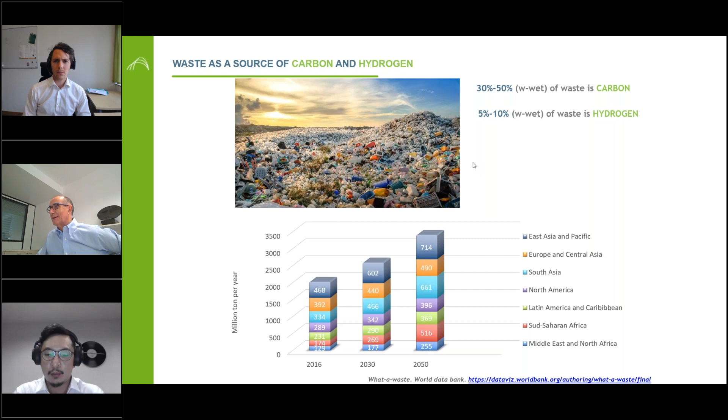This means there is a feedstock available every day, with logistics already in place which works every day, so it is very easy to intercept this supply chain and have a waste feed for the plants.

Our technology is partial gasification. It is a robust technology, and the first units were built in Japan at the beginning of 2000. So now there are more than 20 years of operating experience, and we adapted the technology to the different routes that we now follow to produce many products. All these references show that the technology is very well industrially proven.

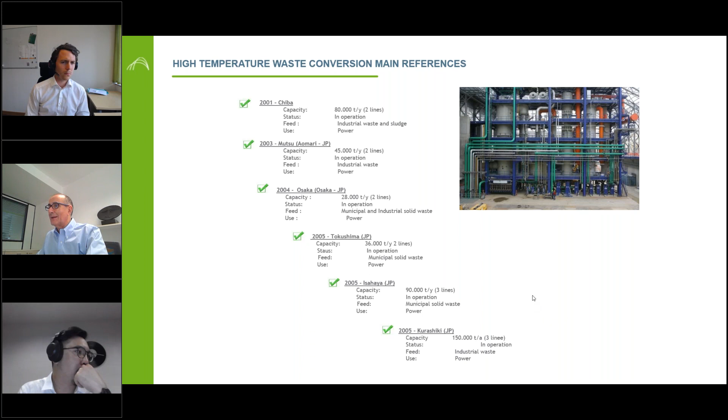In this slide, you can see the principle of how this unit works. There is waste, with its heat content, put inside the reactor.

From the bottom, we generate a liquid inert that is then vitrified once in touch with water, generating small spheres of such a dimension, completely inert, that can be used for landfilling.

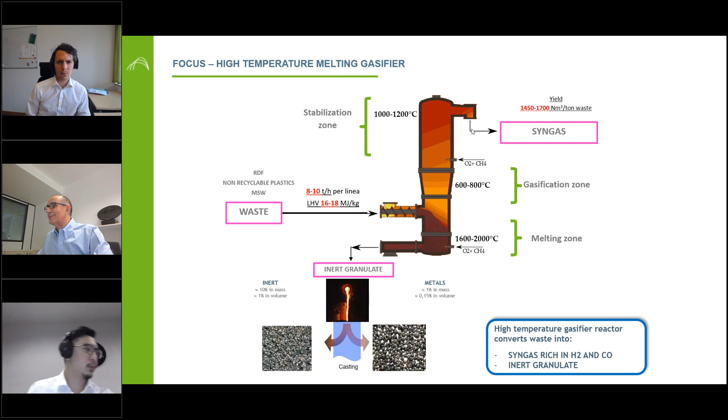At the top, we generate the syngas produced, and now the syngas is submitted to different levels of cleaning and purification so we can adapt other catalytic processes along the line. In the first purification, there is a quench, then an acid scrubber, then an alkaline scrubber.

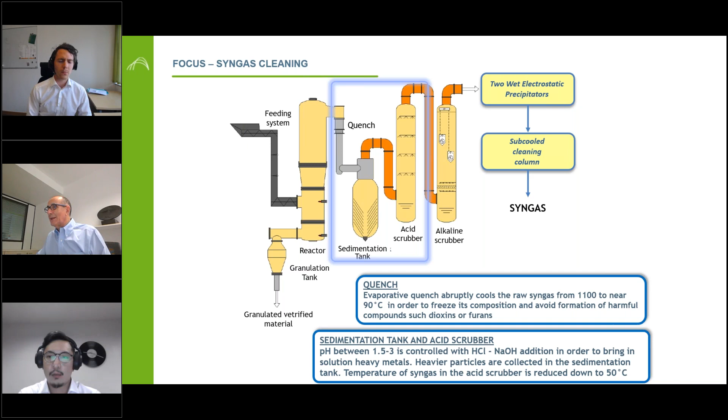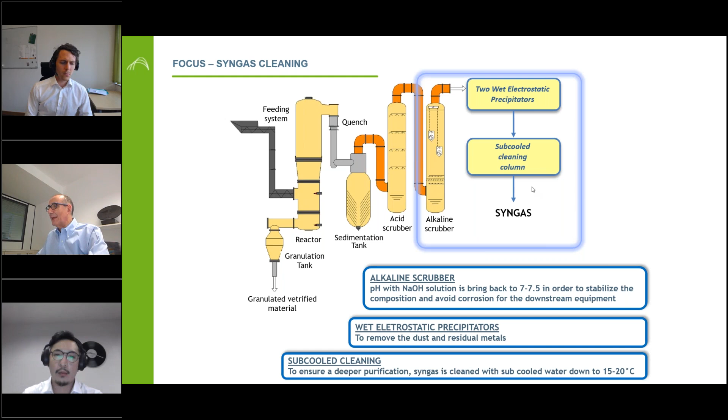Let me emphasize that all the chemical reactions take place in a reduced atmosphere. This means we don't have production of NOx, dioxins, furans, etc., because we are in a reduced atmosphere. After this cleaning, we go with two electrostatic precipitators in order to retain any kind of particles, and then the syngas is ready to be submitted for different purification schemes.

To summarize, it's important that waste doesn't require any special pretreatment. We can admit any kind of urban waste, with no problem regarding chlorine content. Overall plant reliability is very important, so we have several gasifiers in parallel in order to guarantee 24/7 operation of such a unit.

No fly ash production, no dioxins, as I said, deep abatement of contaminants, and then the syngas in the end is rich in hydrogen and carbon monoxide, more or less half hydrogen in volume percent and half carbon monoxide.

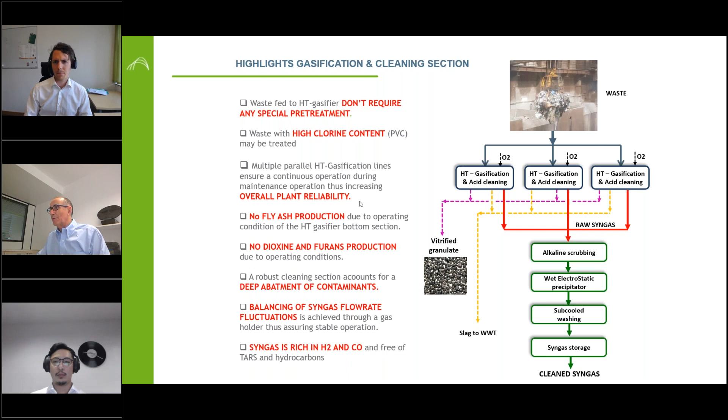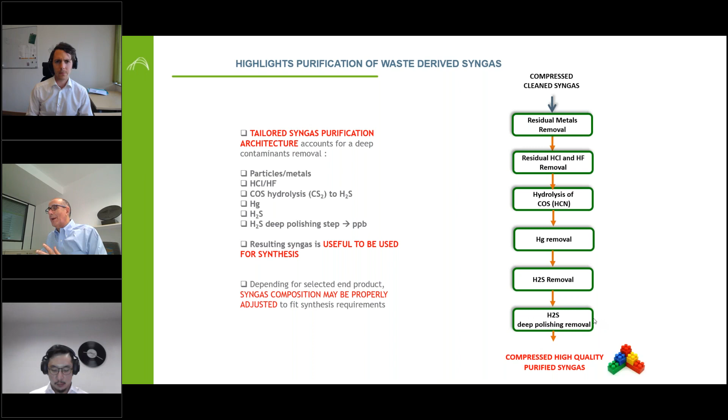Once we have the clean gas, we have removed the residual metals, hydrochloric acid and HF. Then there is hydrolysis of COS and HCN, Hg removal, H2S removal, deep polishing of H2S, and now the gas is ready to go ahead for the catalytic conversion.

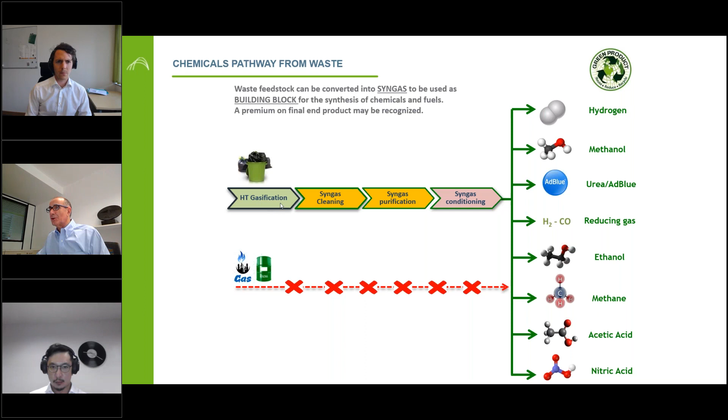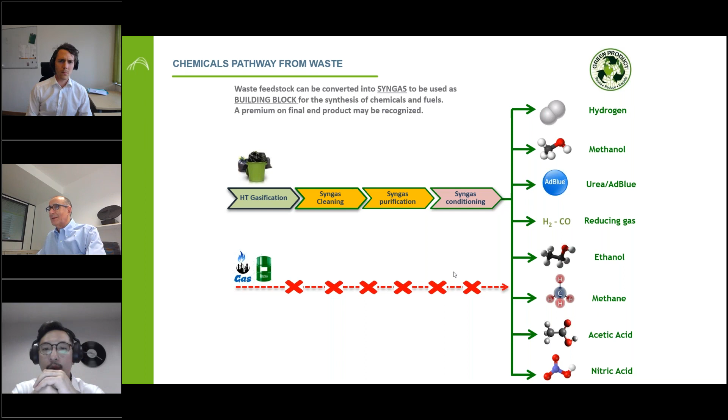This is the scheme that I presented: from gasification, cleaning with water and acid, then chemical purifications, and then all that we can produce. Now we are going to concentrate on methanol, but there are a lot of products that, once you have a syngas, you can generate, starting from the waste.

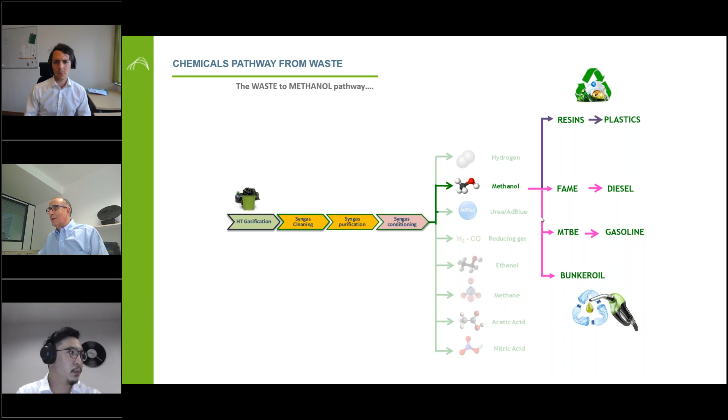Waste to methanol approach. Once we produce methanol, we can do a lot of things with it. We can use biomethanol for resins in plastics, for FAME biodiesel, to produce MTBE for gasoline blending, or very importantly, as bunker oil, which can be the new fuel for the shipping industry if it has to reach very stringent CO2 reductions on the pathway towards 2050. So there are many possibilities, many fields of application for methanol.

An important thing about such a scheme is the CO2 benefit. In the existing case, normally waste is incinerated to produce power, and that produces CO2. At the same time, if you produce methanol starting from natural gas, you also produce CO2. But if we combine everything together, we save the waste-to-energy plant, no longer needing incinerators. We have just one complex that can produce chemicals while also getting rid of the waste generated, meaning there is a significant CO2 reduction.

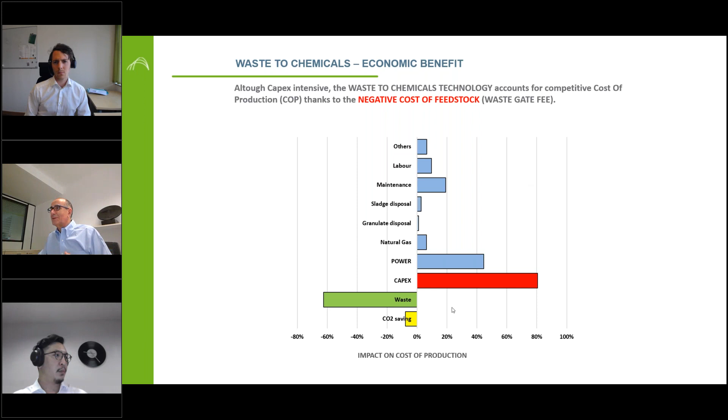Later on I will give you some data on the business case. In this slide, let me tell you the two important cost factors: the capex, because we need to invest significantly, and also the power consumption to produce oxygen from air distillation, which is the operating cost of the air separation unit. Then there are benefits in terms of CO2 savings, reducing the cost of CO2, and also what we call the waste gate fee. In Italy or Europe, when we treat waste we receive money from the government, so we call this the gate fee - it's a negative cost of the raw material.

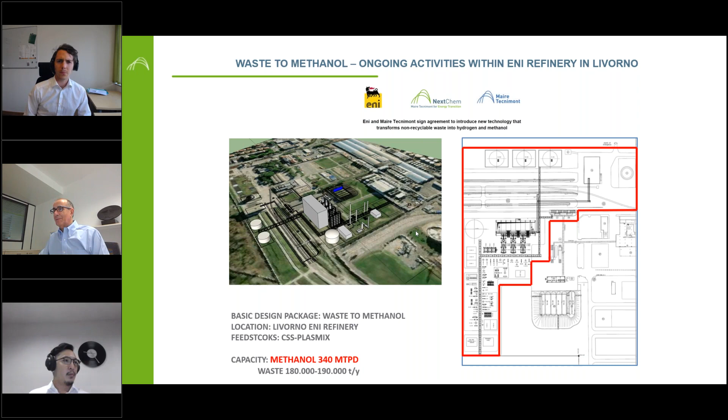This is to discuss a real case. Our idea is not just an idea, it's a real project - the first project in the world, currently in the design phase at the Livorno refinery. Livorno refinery belongs to the Eni group, and this unit includes the tanks and the gasification area. On this side is the rest of the refinery. It's a medium-sized refinery.

The engineering schedule of this project will be completed by this summer, in August. The raw material we are studying is RDF, and also non-recyclable plastics. It's a mix, more or less 20-30% plastics, and the rest is RDF.

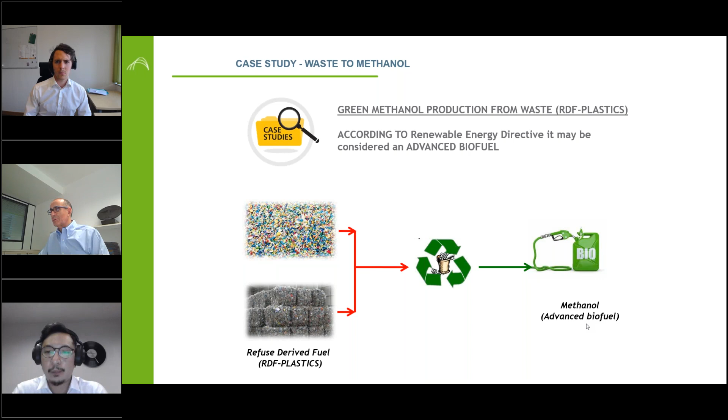The second section is the purification I mentioned before - conditioning - and once we have the syngas, we go into methanol production. With the catalyst we have options, and in any case we are proposing Johnson Matthey technology.

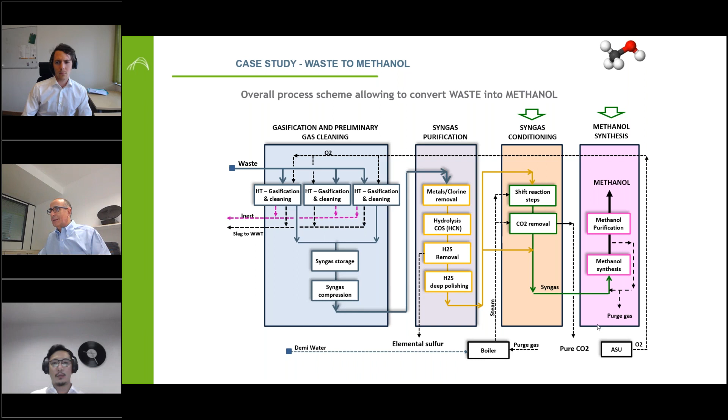Once the syngas is produced, it's important to achieve this key parameter for the methanol reaction - we need a ratio of 2.1. This means we have to increase the hydrogen concentration in the syngas, and to do this we perform a bit of a shift reaction, removing the CO2 produced. This way, we achieve the data we need before going into the methanol reactor.

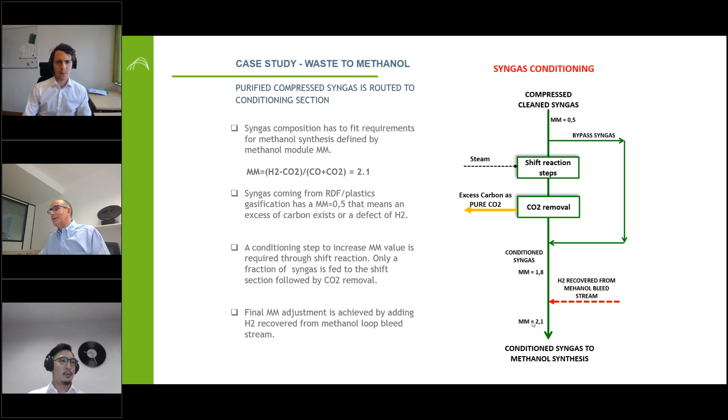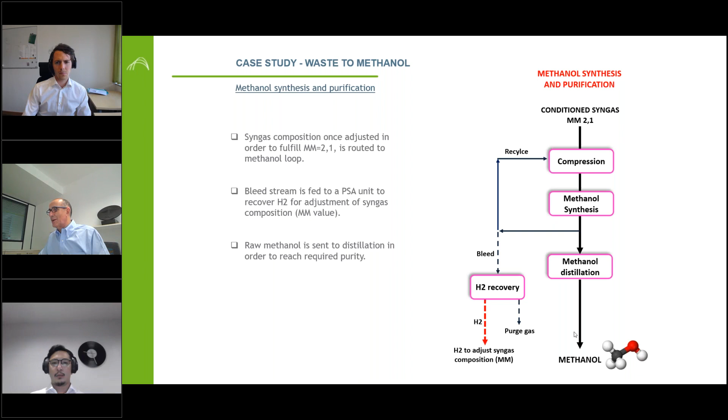Again, here is the scheme: compression, then methanol distillation and methanol production.

To summarize, I've put together all the numbers so everyone can develop their own economics for the project. As I said, the feedstock is a little less than 200,000 tons per year of this kind of feedstock. Then there's power needed for the air separation unit, a bit of demi water for the shift conversion, and a bit of natural gas to maintain constant temperature in the gasifier, depending on the heat value of the feedstock. Then there's the CO2 we generate and the methanol we produce - more than 100,000 tons per year, more or less. With 2 tons of waste, I produce 1 ton of methanol.

Another important data point is the CO2 that we save in this process. When methanol is generated and used as fuel, you generate CO2, even though it is of organic provenience or from waste. What is important is that during this process, compared to the conventional scheme of producing methanol, we save all this quantity of CO2.

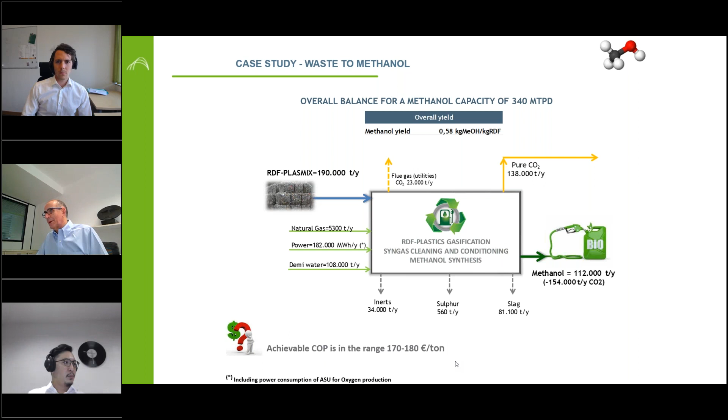Going to my conclusions, let me say that this technology absolutely represents a competitive process, performing a low carbon footprint. It is very, very important because if we have to reduce the carbon footprint, this technology is in this direction.

Another important thing: waste represents a valid source in the world of carbon and chemicals. So I think that the technology we propose can be a real alternative to feeding incinerators. The incineration process can become very obsolete compared with this new technology based on the principle of circular economy.

It fits completely with the circular economy concept, and the economics we are analyzing for this project at the Livorno refinery are very, very good. We didn't receive any kind of subsidies for this project. It is a project that is sustainable not only for the environment, but this approach is sustainable also from the economic point of view. Thank you very much, everybody.

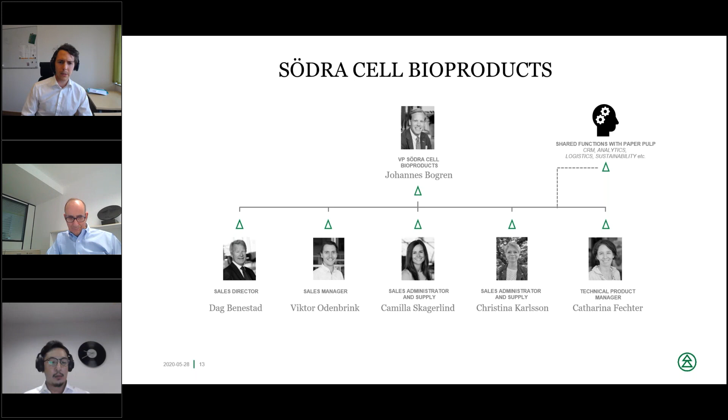So we can separate it and call it liquids. This is a way of having an organization ready for new innovation that can come up from our industries as well. And the portfolio currently consists of crude tall oil and turpentine, which we've been handling for many years. And now we also have our new product, the bio-methanol, of course.

The plant has now been up and running for a couple of months, and we get better each day to run the process, and the quality gets better and better each day. So we are able to produce a little bit more than 5,000 tons biomethanol per year.

So we will now evaluate how the processes work, but it's not a secret that we have two other pulp mills as well, where this technology can be suitable as well. So there are possibilities of increasing the capacity.

We call this product the biomethanol. It's a way of refueling the future. They said it before, but the areas of use are endless almost. You can put it into the biodiesel production, of course, as a pure biofuel, M100.

It can be used as a drop-in fuel in gasoline. It can be used within the marine as a bunker fuel, of course, and also as a broad platform chemical and into the fragrance and flavor industry.

The product we have is certificated according to ISCC, where the greenhouse gas reduction with our biomethanol is up to 99%, which is exceptionally high. So it's an easy way to reduce the climate impact if you can deliver these kinds of products to the market.

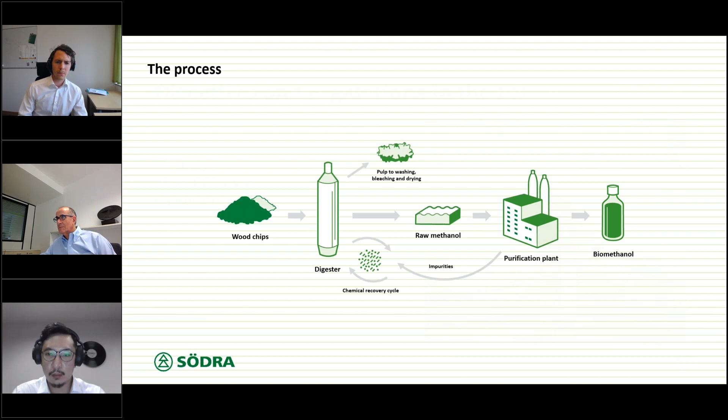Tim talked a little bit about this because there are probably many people out there who's interested in the pricing of the biomethanol. We'll not deep dive into that here, but there are, of course, the Paris Agreement and different regulations and directives here in Europe who can affect this.

And the Renewable Energy Directive 2 is a game changer for this. But still, every nation within Europe is allowed to put their own targets and directives and regulations to support this overall regulation. So you need to deep dive into every nation to get an understanding of the pricing.

But of course, there could be tax avoidance, for example. There could be different kinds of subsidies or tickets. In Sweden, we have a quota system where all the refineries are put under pressure that in 2020, this year, they need to reduce greenhouse gas emissions by 21% when it comes to diesel and 4.2% when it comes to gasoline. So there are many mechanisms behind this, but we won't deep dive into that here.

I think that's good for me. I hope you enjoyed the presentation, and I'll let the word over to Tim again here.